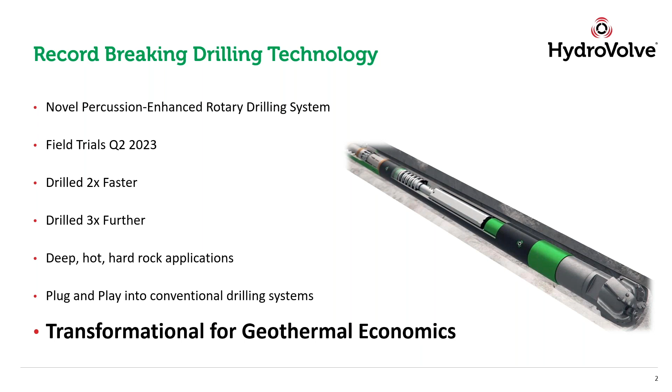What does it mean for geothermal drilling and for the industry itself? Well, if we take a high-level overview and holistically look at different energy sources, the levelized cost of electricity, the LCOE, for geothermal is about $56. If we look at solar, it sits at around $51, and for onshore wind, it's $52. So fairly competitive overall.

A large component of that, like any drilling application, is the capex of drilling itself, and it's a huge contributor to the overall LCOE attributed to geothermal wells. It's 30, 40, 50% of the capex required on a project basis. And if we look at the future for geothermal, to unlock the potential on a global scale, we're into systems like EGS and AGS.

From a capital intensity perspective, they are actually more expensive, currently around $100 per megawatt hour, which is a huge capital component of the overall cost. The drilling contribution there is about 75%. So it's a huge cost, but you can also look at it as a huge opportunity to drive that cost down and move the dial to the left.

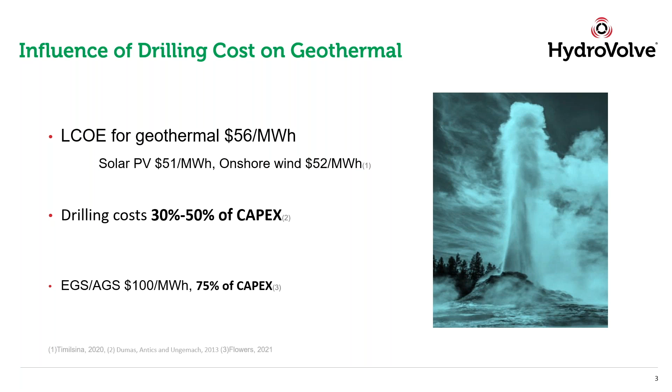What we're trying to do is make sure that it is attractive, it is investable, and we unlock the potential of those opportunities. Make it available for everyone on a global scale, anywhere. We want to be able to scale up, but scale up at pace. So how do we reduce the drilling costs themselves, those huge capital contributions of any given geothermal project?

Well, time is cost. Anyone that's been involved with drilling operations knows that time is money. That's the equation. You have to reduce the time it takes to drill the well. That's where you can make large differences in project economics. So how do we do that? Drilling faster, that's the most obvious place to start. Increase the rate of penetration, the drilling speed when we're on bottom making hole.

A couple of other things we can do, but one of the dominating features is to increase our bit life, to stay on bottom drilling, to reduce that flat time, to reduce the tripping time, and reduce our tangible costs associated with the drill bits themselves.

Conventionally, if we run a choke model on the cost of drilling, we think we're maybe limited by formation evaluation in terms of how fast we can go, or perhaps it's cuttings handling that's slowing us down. Contrary to that, in geothermal, we think, well, it's hard rock, it's that hostile environment that's providing these classic drilling challenges that make it more expensive to drill the wells.

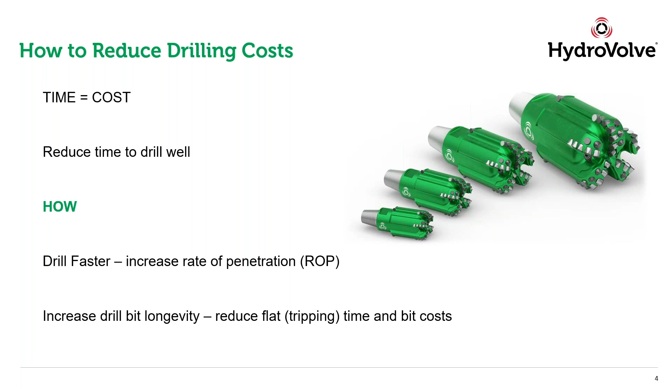So what's percussion-enhanced drilling? What does it do for us? How does it work? Well, it's not new, and it's not HydroVolve's hypothesis that it works and it can allow you to drill faster. A quick literature search will return dozens of examples, SPE papers, and working examples from operators where it's been incredibly successful in terms of improving that rate of penetration.

What is it? It's just a rapid hammering action, that sort of point loading and crushing of the rock, pre-fracturing the rock ahead to allow the drag bit to be more efficient in its cutting mechanism, the way it drills hole. And like I say, it's been used effectively in the past, over decades actually, to increase drilling ROP by several factors. We're not talking marginal gains here. These are step changes in terms of performance. It is widely practiced. It's used around the world, offshore, onshore, throughout really.

But it can be difficult to achieve. There are some unique challenges with it. The systems themselves can be expensive, they can be complex, expensive to build, but also expensive to service and repair and maintain. And they have some unique impediments and challenges as well about the reliability of the systems, the power management, the ability to have the pressure that's required in these systems, and also can induce well management issues as well, working at depth, hole conditions, etc. So a few challenges and impediments that have classically perhaps held back the advancement and the mass adoption of percussion drilling.

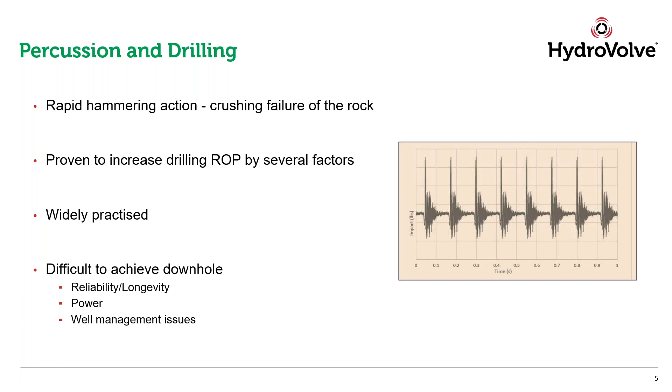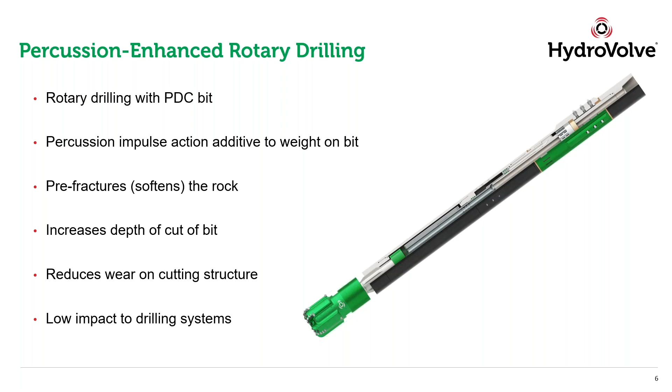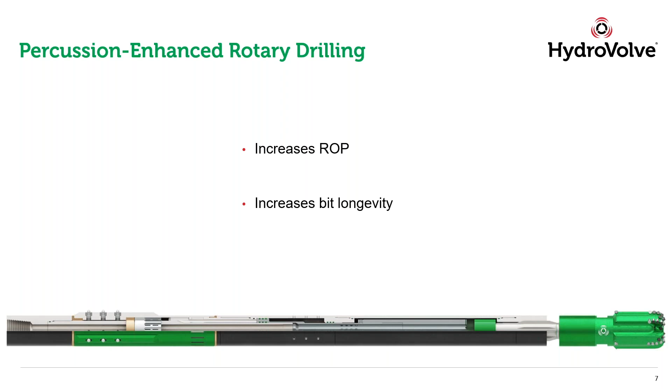And what that does is it reduces some of the classic dysfunctions that you would see in drilling, the bounce, the chatter, the whirl. That in turn creates a nice environment for the drill bit to perform as per its original design intent. So we can reduce the wear on the cutting structure itself, and we can create a lower impact to the drilling system and the drill and the BHA as well. What are we trying to do? Increase ROP and increase the bit life. We want to create that environment to allow the bit to perform as it was originally designed to do, per its design intent.

What does our system look like? It's quite simple. Actually, it is plug and play. It's about 9 feet, 10 feet in length. It can sit directly behind the bit. It's hydraulically powered by the drilling fluid, whether it's water-based, oil-based, pure water, aerated systems. And it operates automatically. Basically, as soon as you want to drill ahead, as soon as you're pumping, then the system kicks in and we're operating.

Interestingly and quite uniquely, we're full through-bore access. We don't induce pressure drop. We're not adding parasitic pressure losses to the system overall. It's negligible in terms of what we have from a pressure requirement. And we're full metal valving, so we're ideally suited to be deployed in these hot, hostile environments. Simply, it's premium connections, top and bottom. At the bottom end, we go directly onto the bit. Like I say, we can go elsewhere in the BHA, but classically, and certainly until now, we've been deployed directly behind the bit to provide that axial motion, that incremental weight to the bit.

It's a telescoping bit sub that we have. At the top end, we have a non-rotating sleeve that provides the opportunity for our valve assembly, this infinity valve assembly that we have, that really is the operating system of the tool itself, rotating valve assembly, driving a piston straight onto a hammer, an anvil, and then onto that telescoping bit sub and directly onto the bit to provide that additive weight on bit and point loading that you require.

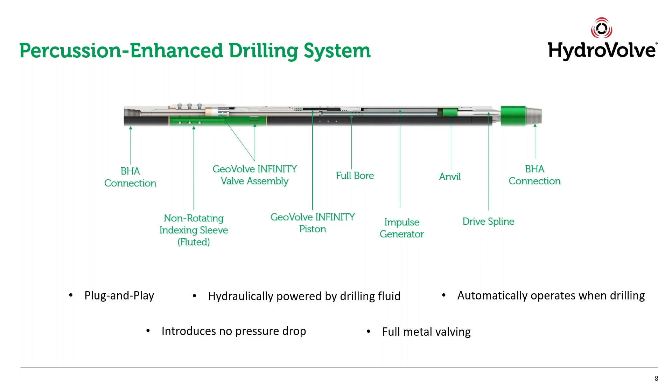We've got a 5,000 PSI test loop, Gardner Denver PZ9 pumps, a Caterpillar 1,000 horsepower engine, and twin HPUs. We can rotate our drill string at about 130 RPM for test purposes, and we can push and pull over 1 million pounds of load. We're fully instrumented, fully automated. We can monitor, capture, record, and crucially, we can witness any of the testing and qualification that we do as well here in Aberdeen.

So we embarked on a series of tests late in 2022 and early in 2023, whereby we started off just very simply understanding the output characteristics and capability of the tool. And then we moved on to a series of drilling tests themselves, using a variety of third-party bits, PDC bits, to drill out cement, mock conglomerate, and ultimately we drilled granite. Good old Aberdeen Rubislaw quarry granite in 3-meter sections, very high compressive strength, very low fracture network, to complete our trials.

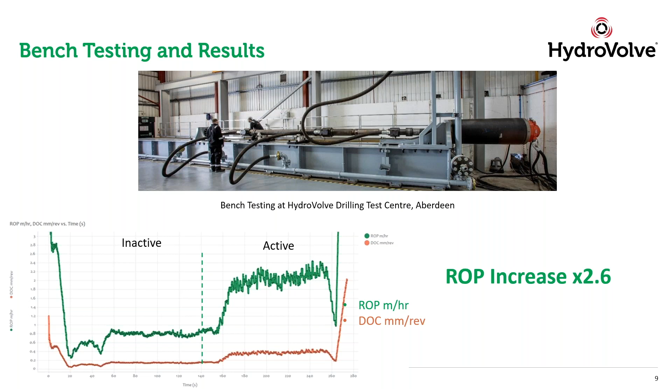It was a direct correlation, very, very prompt, very obvious, where we got a step change in the ROP when we were drilling this granite. As soon as we turned on the GeoVolve HYPERDRIVE, we saw that step change in improvement performance, 2-3 times as fast as we were drilling with the same parameters in rotary mode. So very, very encouraging, tremendous results really.

Moving on to the field, the initial field trials. What we've done early in 2023 is we've had multiple trials with the operators in continental Europe. We've used the sizes that we currently have available for 6-inch drilling, 8.5-inch drilling, and 12.25-inch. And we've had some really fantastic results. The fastest ROP ever recorded in a prolific drilled basin. We had the longest drilled interval ever recorded in that extensively drilled basin.

We doubled the ROP average across the field. It's a field where they use multiple technologies that people would be very familiar with, several tier 1 bit suppliers, so very, very pleasing. And we also tripled the average distance that we went across that field. So we went faster and further.

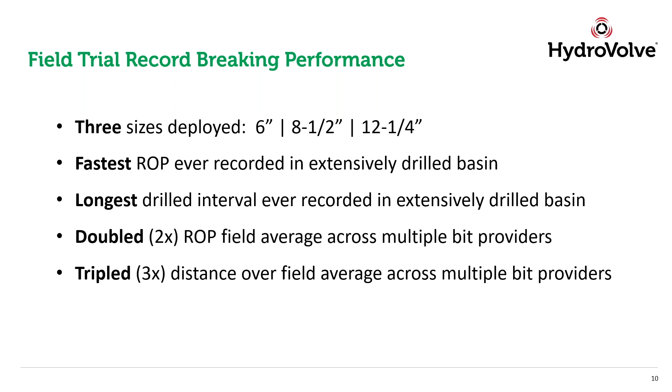Looking at one of the field trials, technical performance in particular, I will place some compliment here to some of our peers that have helped us. We talk about the performance of the drilling bit itself. We work hand in hand with a company called Zerdalab with Vasily and his team there. And in tandem, we produce tremendous results across the board here from a technical performance perspective.

Flow durability and our resilience was over 350 hours circulating with a fairly high density mud, 2.1 SG in a single deployment, top to bottom. We were almost 30 days on bottom at bottom hole temperatures, static temperatures of over 220 degrees C. We drilled for over 250 hours, single run, with a tool at over 220 degrees C.

We evidenced tremendous durability from a tool performance perspective, drilling over 600 meters, shoe to shoe. The best offset was just over 200 meters in that area. And very pleasingly, we also took on the challenge from that shoe to shoe drilling campaign of drilling out the shoe track itself. And I think that was drilled in record time.

I do accept that some of the purists amongst us may say that's not always a good thing to drill shoe tracks so quickly, but it's in the books now. And like I say, we proved the capability of our own drill bit design that we developed exclusively with Zerdalab, a PDC drill bit there.

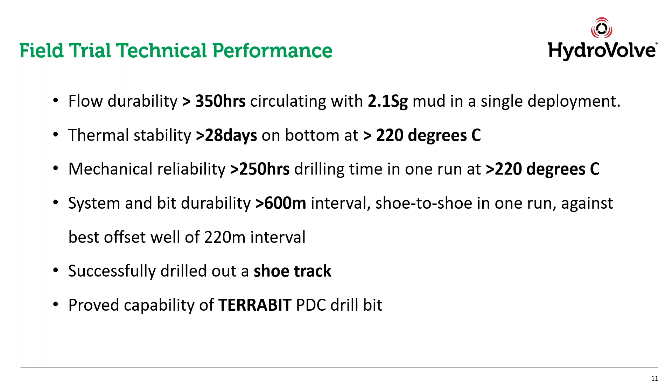Moving on to case studies expressly that we carried out in 2023 as part of those trial wells, just to give a sort of flavour and insight as to the sort of challenges that we had. Here we're very deep. We're over 6,000 meters. S-shaped well. We were in the vertical component towards well TD. Low inclinations between 10 and 20 degrees.

And interestingly enough, very contrasting lithology, quite challenging, from shale sections to sandstones and limestone stringers. So interbedded formations, it's a classic question we get, is how do we perform in interbedded formations? Well, this is a working example, a challenging environment where we did very, very well indeed. Shales of very, very low compressive strength up to these sandstone cleaner reservoirs at 20, 25, I think even 28 kpsi were encountered. So that was the challenge.

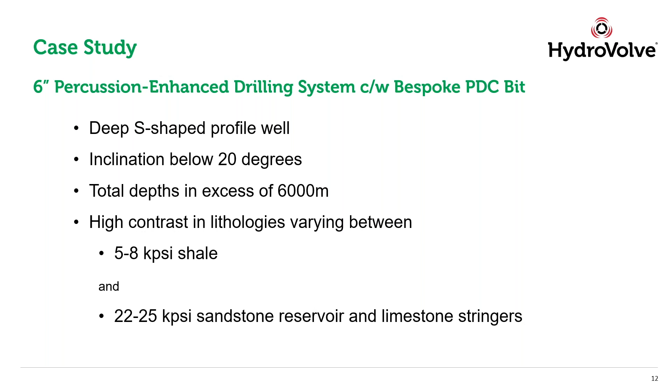What did we do? Well, the first thing we did before we embarked on the project is we asked the operator to define success. What does success look like? And they provided us with 25 of their best analog wells in this basin. It is a prolifically drilled basin, I should say. It's a continuous campaign. And we were asked to perform this 6-inch drilling trial here early last year.

And success was attributed to a single run that would be of 100 meters run length and at about 1 meter per hour. Slightly better than the field average. If we look across the base axis, we can see the ROP going from 0 to 2 meters an hour and the run lengths from 0 to 230 meters. The average is just under 1 meter an hour in this field, and they do about 70 to 80 meters. And what we can see is that we've exceeded even the operator's expectations and perhaps our own for a first run, to be honest.

We set out with the design engineers with the intent of saying, what does our own internal success look like? And we coined the phrase double. We thought it'd be good to double the ROP and double the average run length. And we've exceeded that in terms of the run performance here. So the Hyperdrive being placed at the top right-hand corner, illustrating the performance of the system itself. It's a system approach we take. We use the Hyperdrive and the TerraBit itself. So phenomenal performance, a field record in terms of straight line speed, ROP, but also in terms of endurance and durability, setting that field record for distance drilled.

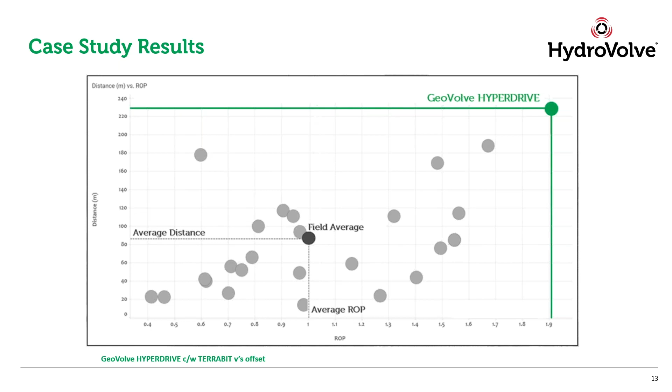Anyone who's been involved in drilling deeper wells knows that actually on-bottom drilling can be your sweetheart. You can lose a lot of time, money, and be somewhat frustrated if you're tripping. So that's why the operator was looking for longevity and run length rather than just pure straight line speed. How does it translate for that operator in this application? For the 6-inch hole, with our run rate, we would have saved them over 7 days. But crucially, the overall time saving, because we're on bottom and continuing to make forward progress, was almost 20 days. We've saved drill bits, and overall, we've slashed the cost of that section. So over $1.4 million for that operator. A pretty impressive trial, I would say, by anyone's measuring stick.

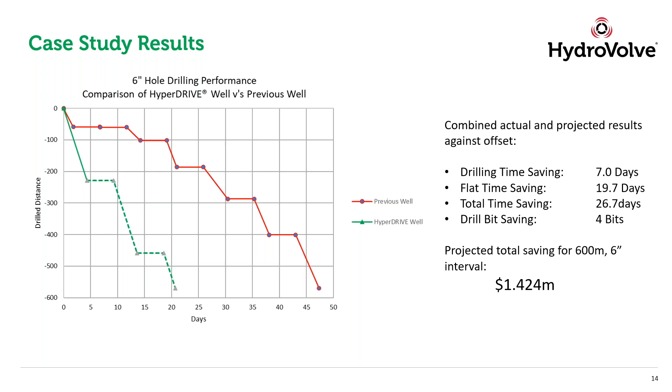So what have we got? Just to summarize, we believe we've got technology for today. We've invested a lot of money, time and resource developing, designing and testing the technology, and then piloting this new technology in these trial wells. It is novel, it is unique, we believe. It's a percussion-enhanced rotary system. Excellent field trial performance. Like I say, drill twice as fast, 3 times as long in the deepest, hottest of hard rock applications. We can plug and play into conventional drilling systems. There's no electronics, no other control systems required. Standard conventional rig applications here. And we genuinely believe that we can provide that transformational change in terms of geothermal project economics.

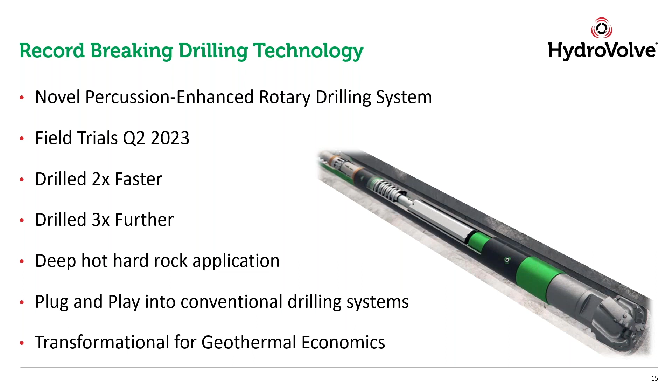I see here that we have a lot of questions dripping in, but I'll maybe start with a few more general and naive questions on my end regarding the subsurface. Geothermal differs quite greatly from hot volcanic regions to granite conditions and sedimentary conditions. There are quite some differences, and I would assume that also differentiates how quickly you can drill through it. But what impact does the temperature actually play in getting ahead as quickly as possible in drilling? Did you study how that impacts it, and to what degree?

In terms of what it means to the rock and bit interface, or do you mean in terms of the tool's performance itself? So basically subsurface temperatures. If you can drill into very hot regions where you have 200-300 degrees Celsius and more, versus lower temperature resources in the context of heating projects that maybe go down only 1,000 meters and have 30 or 40 degrees. Yeah. And what's the correlation on the speed of drilling in that context, apart from the geology itself? Yeah, so looking at a literature search, we're comparing ourselves on a side-by-side basis versus the other technologies that have been deployed in similar areas to date.

And really for us, it's about the rock strength itself at the depths that we've been at today and the temperatures we've been at today, not so much the temperature itself of the rock. It really has been about the rock strength itself and the physical, petrophysical properties of the rock itself, the porosity and density of the rock. But we're always comparing ourselves on a side-by-side basis by what's been done to date. We've not got to the position where we're extending the boundaries and moving to supercritical, for example, or 350 beyond. We're not there yet.